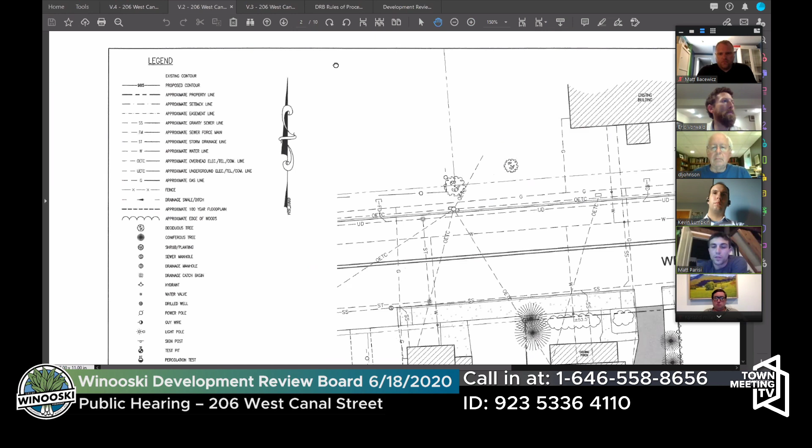So in any case, what we're proposing is to add a third unit, a detached cottage. You can see it, it's shaded in black here. If he scrolls down, you can kind of see the third unit. It's going to have a footprint of 28 feet by 33 feet. It's about 6 feet on the east side, the east side setback. I don't remember exactly how many it is, but it's more than 6 feet on the west side setback.

So we're proposing to essentially get rid of the old paved driveway and replace it with a gravel driveway with 4 parking spots, as you can kind of see there on the west side. Those do encroach a little bit onto the west side setback there, so that's something Eric kind of mentioned earlier.

Something else we're going to be getting rid of is the existing deck of the duplex, to increase the parking. This cottage, and we'll get to there as we go through, is actually going to be a garage, a 2-car garage. So we'll have a total of 6 parking spots, 2 in the garage, 4 on the side here on the west side. And then there'll be an apartment above it, essentially.

That's obviously more than the required number, but I think people always have guests over here and there, although COVID has changed things a little bit, but it allows for 1 extra parking spot, essentially. So you can kind of see the water sewer connections. Not sure if there's any other questions here, let me know before we move on to the next page.

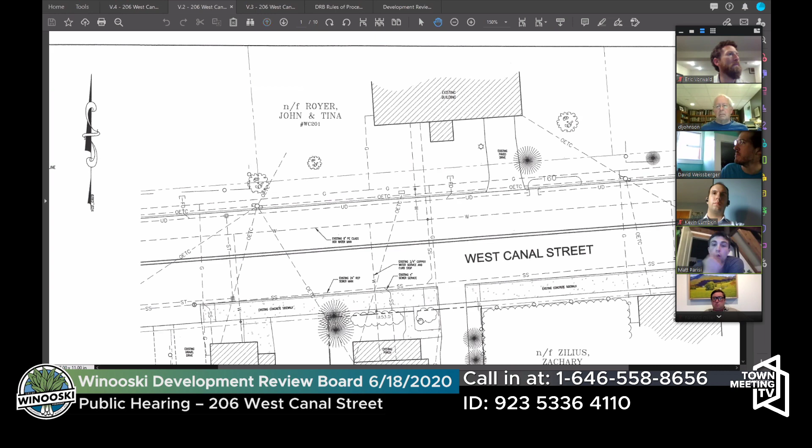That's actually a really good point, I'm glad you brought that up. So if we scroll down just a little bit more, there should be the existing shed. Yep, so there you go. That's essentially the back line to give you kind of a reference. That's the back line of where the new building is going to go, kind of the southeast line there.

Right after that, about 5 to 10 feet after, is where the grade really drops off. The existing 100 to 150 feet is less than 5%. After that, it increases substantially, so we're trying to avoid any serious runoff or erosion issues.

That shed has been there, just for reference, for at least 20 or 30 years, and it hasn't shifted. It's actually still pretty structurally sound, but for the sake of building this, we're going to be getting rid of it.

Yeah. So I think if there's not any other questions, we can continue on.

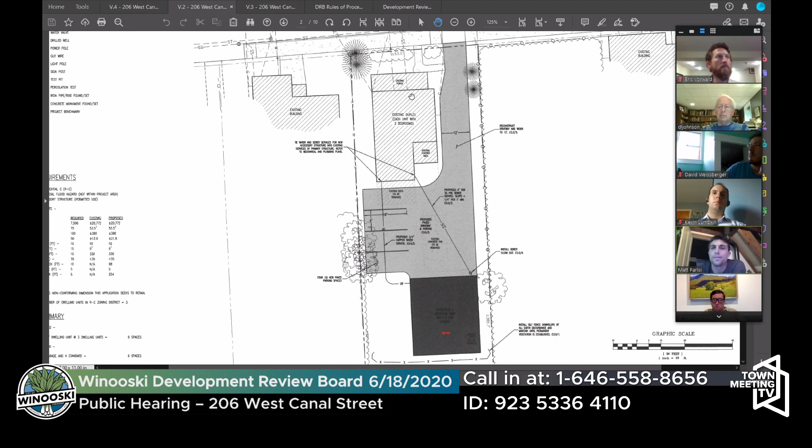It'll be very similar to the other places I've built before. It'll be a clay color, very neutral, with probably a charcoal roof, essentially. So pretty earth tones.

How much living space is on the first floor there? I thought it was going to be all garage, but I see what looks to be something else. Yeah, so that first floor, thank you for mentioning that, that first floor is a garage. In the plans, they have windows in the garage. I probably won't have those lower windows present unless everyone in the DRB really wants them, in which case I will put them.

So we're just supposed to look at this, and all we're supposed to see is a slanted roofed cube with no guarantee of what the elements on the outside of the building look like.

Well, I would urge the DRB to essentially say, based on what I'm talking about tonight, that we want it to have all of the elements that you have described in this meeting. It's going to have, like I said, I'll put all the windows. The only thing I was planning on changing was the siding, the 2 windows on the first floor facing south, and the deck, which I was planning on building out of pressure treated lumber. So those 3 things essentially. But the footprint, the slope, the interior, none of that is going to change whatsoever.

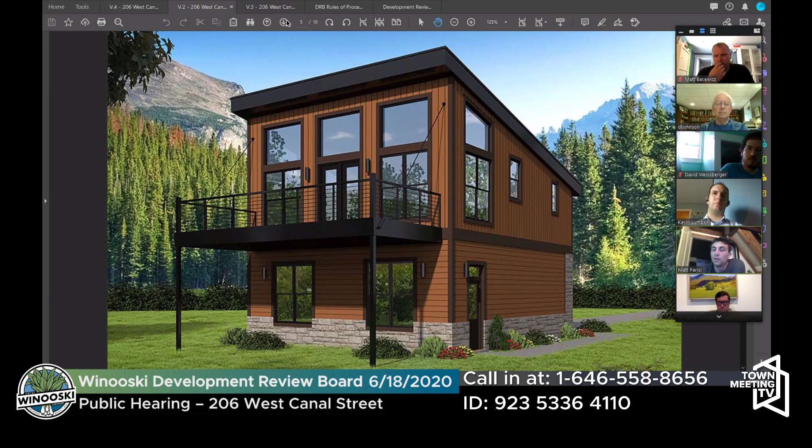So yeah, this is the east side. We're looking at it, it kind of shows you the height. The right side just kind of shows you the western portion there.

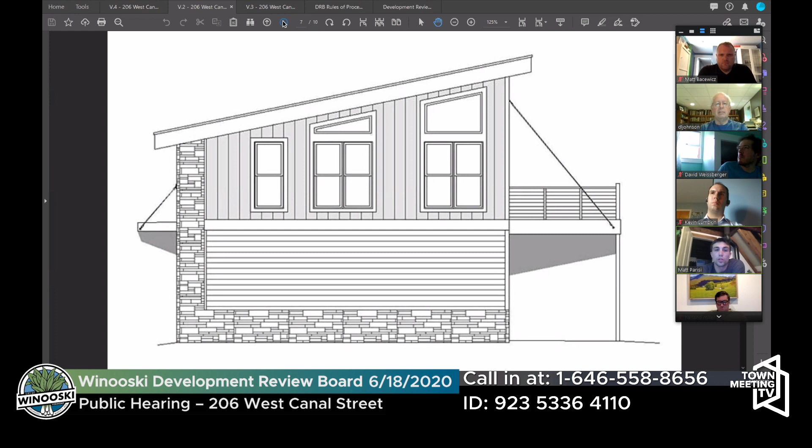Probably want to back out a little here. So as you can see, the garage is a 2-car garage, for 2 parking spots. There's that porch you saw in the first picture way back at the beginning. You have an entry area, kind of a mud room, then there's the stairs going up to the second story.

So this is kind of my vision for the second story. Total square footage is just under 1,000 square feet, it's 999 square feet. They'll have vaulted ceilings on the front here, closer to bedroom 2 and the balcony deck, because it's a slanted, single pitched roof. Down near bedroom 1, the ceilings are about 9 feet. You can see that difference.

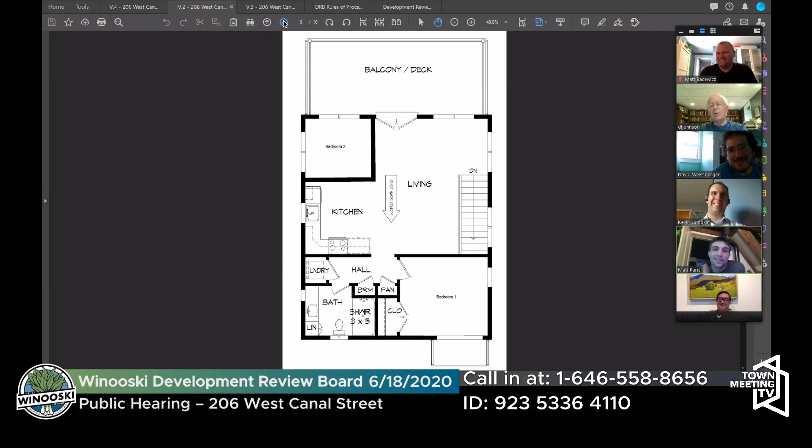Do you plan to put a door into bedroom 2? Yes. Only access via the balcony? Yes, through the window, that's right. Where do you plan to put the door? I can't really draw it, but I think I'd put it right in the middle, so if you're coming up before those doors open to the balcony deck area, access is right there.

To clarify, that's 1,000 square feet per floor, but the garage is considered unfinished. The total building is 2,000 square feet. So nothing in the garage will be finished except for that entry area.

If you look at it, I don't know why, it says main living area is 75 square feet. Upper living area is 924. Obviously I made some edits here.

The garage will just be, it has to be insulated, obviously, because there's water and sewer pipes running up, but it will not be finished. There will be no drywall or anything like that. It'll be a pretty simple garage for all intents and purposes.

Exterior walls will all be 2x6 construction. Roof framing is truss. I'm not really sure. Is there any other questions?

Oh, this is probably a big one. Obviously, the building is going to be sitting on a slab with anywhere from 4 to 5 foot frost walls, depending on how far down they have to go. I'm not sure. Any other questions here?

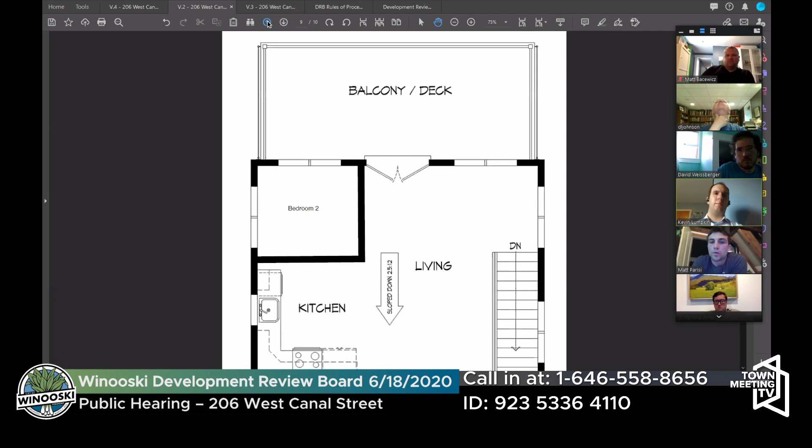Do we have a calculation on the impermeable surface on the lot? What percentage? I believe it is, it's on the existing plan. I saw it, or the new plan. And we actually have it.

Eric and I did it, I did it on my hand-drawn plan. Eric, do you have it off the top of your head? I do, yeah, so the existing, I want to say it was about 30%. It was, yeah, that's right, about 30%. It's in that list on the left, Eric, if you zoom in there. Yep, oh there it is, perfect. So yeah, I have 29.8%.

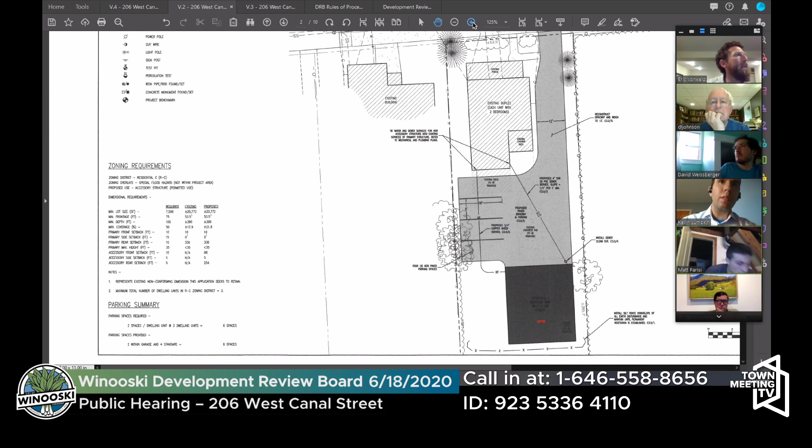The existing duplex is 841 square feet. Porch is 176. The side porch is 90. The new drive is going to be 2,900 square feet. New garage and apartment is going to be 924 square feet, which totals about 4,900. The lot is 0.38 acres, or 16,500 square feet, give or take.

Any other questions? I think the maximum is 50% in the RC zoning district. Yep, yeah, so I think.

Any other questions from members of the DRB before we hear from what looks like some adjoiners or neighbors? I'm just unsure of the setbacks in this area. Is it 6 feet or 10 feet?

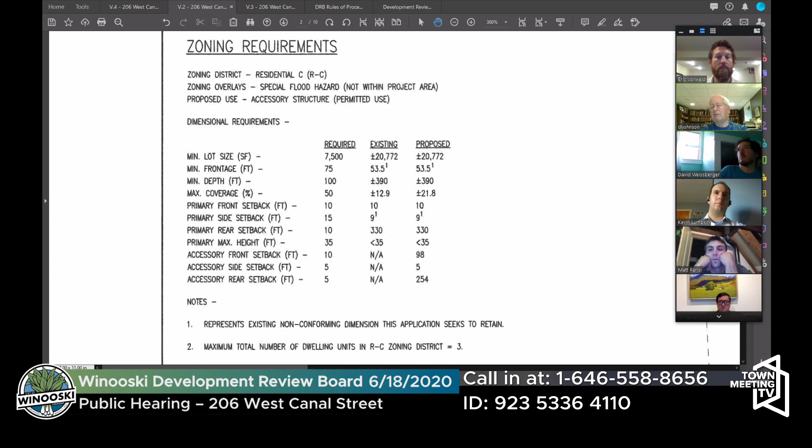So for the accessory structure, the setbacks are actually 5 feet in this zoning district. So where it's placed on the diagram, I believe it's 6 feet from the eastern property boundary, and then 250 from the rear property boundary, and plenty from the western property boundary. This dimension, I believe it's 6 feet on this one. The west side is about 19. So the large one.

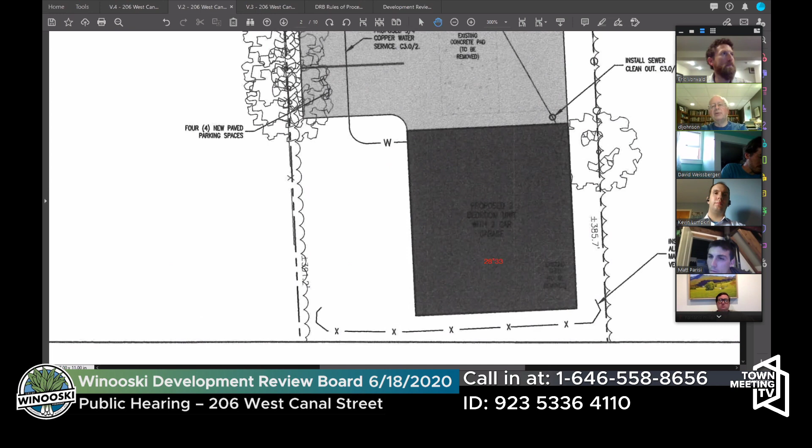Anything else from DRB members? I just wonder whether it's reasonable to expect that the occupant of the detached cottage will want to park their car in the garage all the time.

To begin with, the plan is to have my father-in-law and mother-in-law, who are relocating from Western New York State, occupy this for at least a year. Hopefully they have 2 cars, so I know he'll be using it significantly. After that, even if only one person parks there, we have plenty of parking. Based on my limited experience, there's plenty of street parking on West Canal Street.

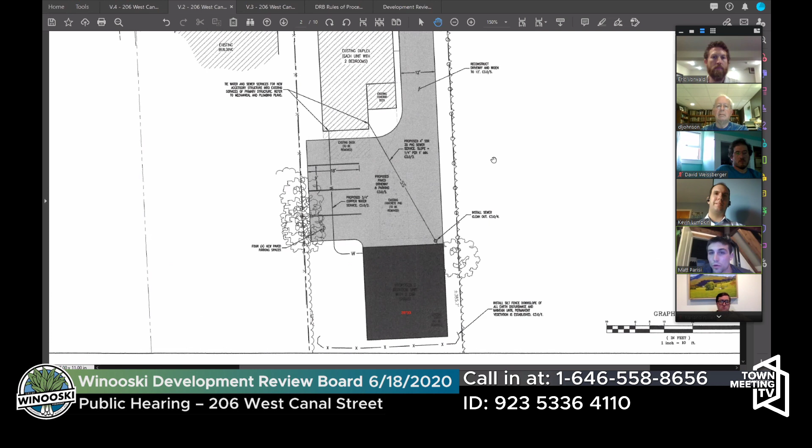I personally, in the wintertime, if I had a garage with an apartment above it, I would want to pull my car into the garage. But that's a personal preference thing, I can't control what people will want to do. That will be their designated spot, though, I can tell you that.

You're looking at the garage door. Are you fitting the 2 cars front to back or side to side? It is side to side. I think the plan would be to go with 2 garage doors there, but there is enough space for 2 cars in that garage.

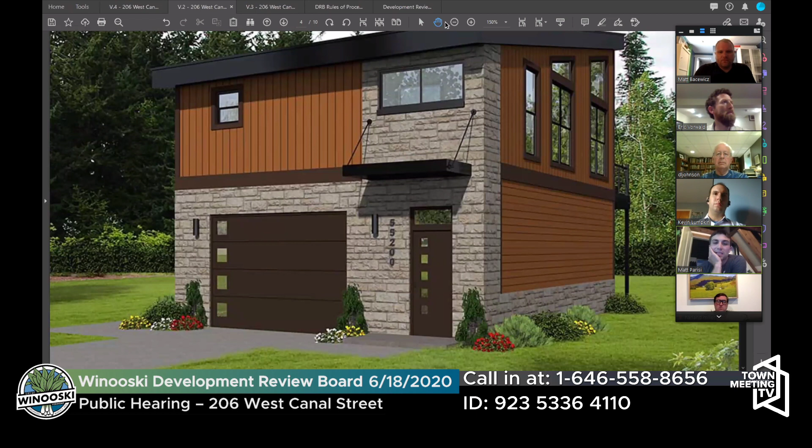From a dimensional standpoint, I know there's plenty of room for both vehicles. But you're thinking of cutting a wider opening? Yes, exactly. If you look at it, you've got probably 4 feet between that entry door and the garage door, and then another 3 feet between the wall there and the garage door. So I would make it wider and put in a standard double door.

And I think the renderer that did this, obviously it's not perfect. But I'm totally willing, my architect is working on it. He's designed the 2 other places I've done, and I'm absolutely willing for it to be a condition that you can see the final plans before approval, just to make sure everyone's on board.

But like I said, the largest difference you're going to see is the siding. The deck's going to be built out of pressure treated lumber, and no windows in the front on the garage level, unless that's something people want. I don't mind doing that, it's just in a garage I don't really see any reason for it.

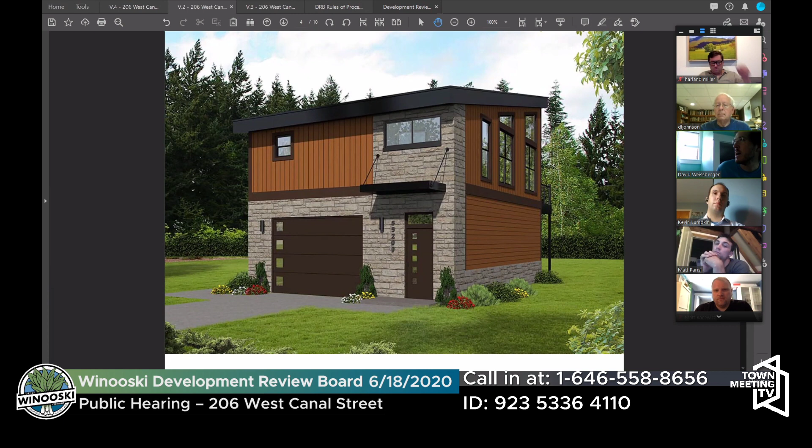Matt, I have a question. There's a door on the side of the garage, and in the renderings, it looks like there's a sidewalk going to that. Do you intend to do that?

I would, but I'm willing to not do it. I think it's going to be really tight to the setback there. So if the other neighbor I've spoken to wants to weigh in, I'm totally fine not doing that, or I'd suggest putting that door on the other side if you want to do it. I don't feel strongly either way, since there's already a door into the garage and the garage door, and the lot is tight, I'd prefer not to do it. But again, we can do it if need be.

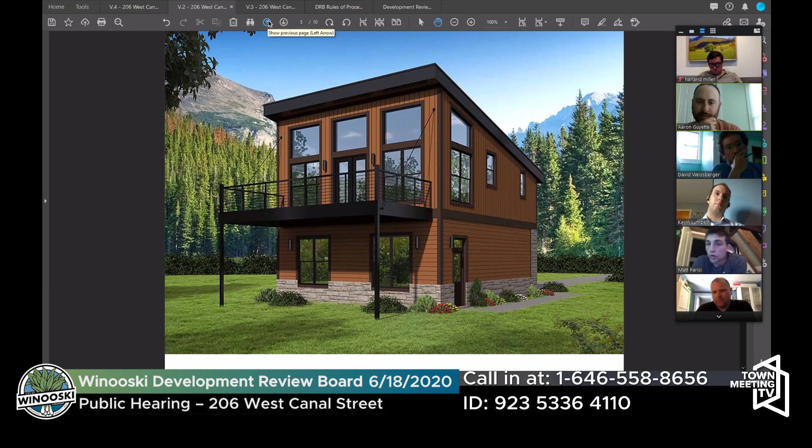I am kind of wondering about Doug's question about parking in the garage versus parking in the driveway. If you want to wash your car or something, you'd park it in front of your garage. But with this layout, there's no room to park anywhere except the garage, or else you're cutting off 3 parking spots.

Well, I think that's a valid point. I think the answer here would be we are providing more than the required number of spaces, so if somebody wanted to wash their car, they could use that guest spot in theory. How long does it take, an hour at most to wash your car? I think that would be a reasonable way to go about that.

Yeah, that was the first thing. Second question is about snow removal with a reduced setback. Assuming you're going to have this plowed, but with a reduced setback for the parking, it seems like you'll be pushing snow onto the neighboring property. Yeah, I think we're leaving that southwest portion open to dump the snow. There is room on the west side and the east side, but most of the snow will be going towards the southwest portion there.

Is there a fence between the properties? Yes. I was actually speaking with the neighbor at 196 West Canal Street, which is on the east side here. He wants, which I'm fine with, when we clear out some of the trees here, to rebuild the fence there anyway. So I think he plans on applying to build a fence along that border. For what it's worth, that's on the east side, the one with the really tight boundary, the tight setback.

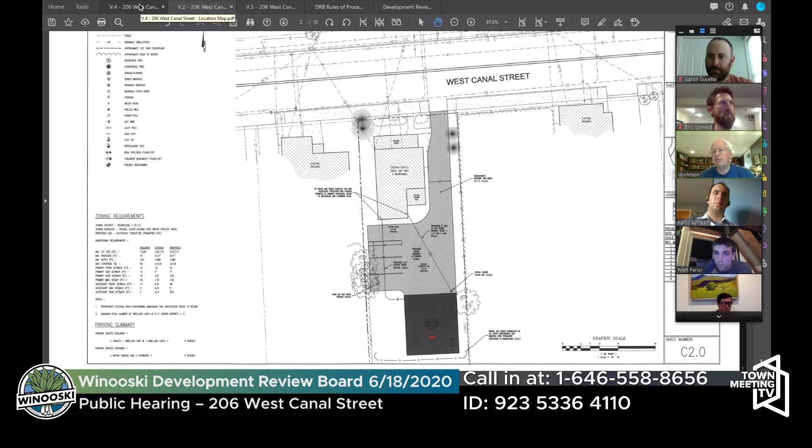Can I ask one other question? That relates to the drop off behind the building here that's being proposed. There's a change in elevation from the terrace structure in which everything on West Canal Street is built to the floodplain of the river. Am I correct about that? Yes, there is. So my question is, are there any signs of erosion in that slope at the present time?

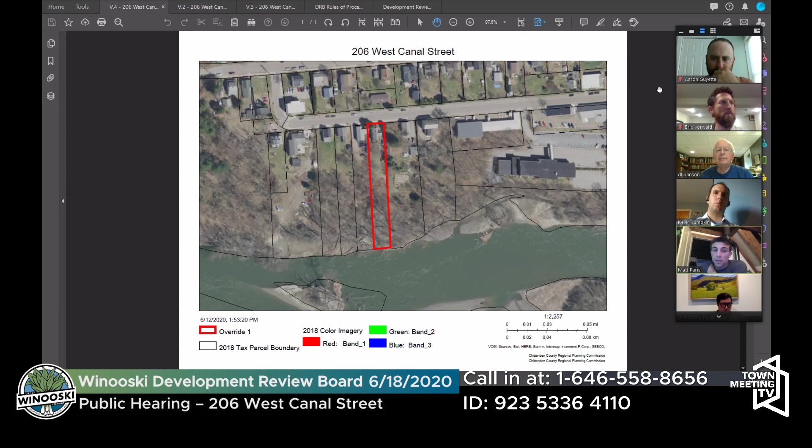In my limited experience, as well as having Jeff Oleski from Catamount Engineering walk the property and take a look at it—he's the one that drew up the site plans—he said essentially, where you have it, where you're planning to build is fine, but you really don't want to go any farther south. That's when we start running into erosion issues. There's no signs of the hillside eroding, but we don't want to build any farther south. That would increase the load on the hill.

So my question, Matt, is what kinds of precautions are you going to take against erosion and against movement of material downslope during the construction period? Right, so Jeff actually already put that in the plans because he was worried about that. He says install silt fence downslope of all earth disturbance and maintain until permanent vegetation is established. So there will be a silt fence established there, which during construction will keep anything from going downhill essentially.

And there's also, you can't see it in these diagrams, but probably about 10 to 15 feet after where the structure is going to be built, after that silt fence, there is significant growth of 3 to 15-year-old trees, very heavily forested.

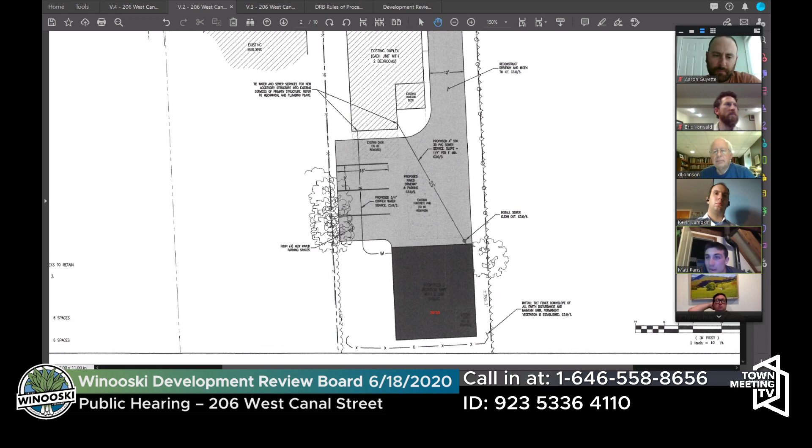You're not envisaging any sort of pathway from the back of the detached cottage down to the lower river terrace? I'm not envisioning building a new one. There's actually an existing one between the neighbor's property and mine at 196 West Canal Street. Across property lines, you mean? Well, it's hard to say. I haven't gone all the way down to the river, but you can follow—there's an old footpath essentially.

Then he has a terrace garden—you can kind of see it there halfway through. Yeah, exactly, that's this right there. So he does have, it's not like there's gravel, steps or anything like that, but you could walk down to the river if you wanted to. But that would be on his property. I'm talking about whether there's anything on your property. Oh, no, nothing existing. That's correct.

And you don't intend to put something in? No, I don't intend to build a walkway down to it. I'm mostly looking, in the future if it does happen, to just make it so—like right now in the summer you can barely see the river, so it's great in the winter, fall, and spring—but no, I don't plan on building a walkway.

I have a question for Eric, I think. I see that the existing frontage is 53 feet, and there's a note that this is an existing non-conforming dimension. Is there not a waiver required to develop this cottage on the lot?

No, is the short answer. Since it's a pre-existing non-conforming lot, as long as they can develop within our current requirements, then he can develop. The accessory structure only requires 5-foot side setbacks and a 10-foot rear setback. So he's under the impervious cover and within the setbacks, so he's able to develop the property. Okay.

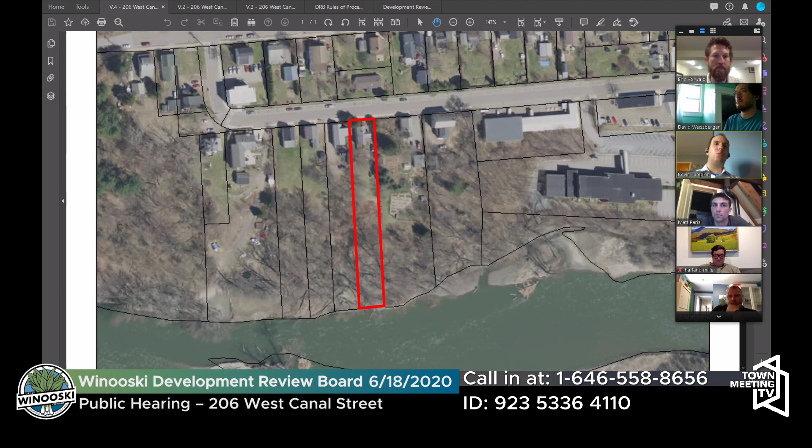Eric, what's this about? Yes, thank you very much. So I'm going to close a couple of windows here. So this is an amendment to our rules of procedure. As you recall, we previously adopted the rules of procedure back in, I believe it was February.

In those rules, there is a line that talks about remote meetings. In that language, it notes that one member of the Development Review Board would be present at a location where the public could gather for a remote meeting. This is actually inconsistent with state statute, where it does not require that a member of the body be present, as long as a staff member is present at that location as well. So this update is basically just amending that language.